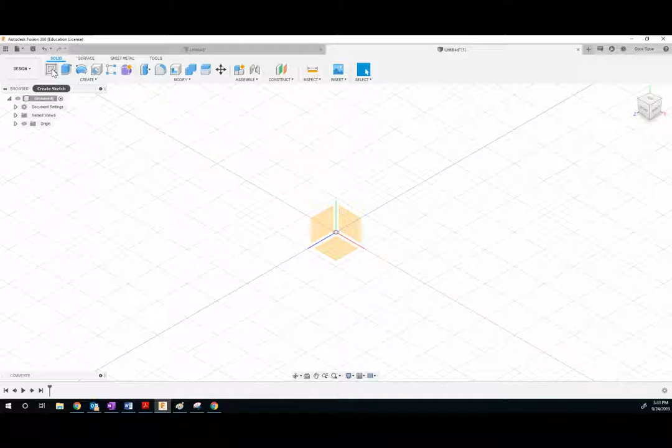Okay. So the very first thing that I think we should do is draw the rectangular base. So it looks like this side is 3. It's 3 centimeters. And then the long ways, that's like 1 plus 2 plus 2, that's 5. So 3 by 5. Let's make the rectangular base. So to do that, we're going to create a sketch. I'm going to do a rectangle. And I'll make this 3. I'll press the tab button. 5. Okay. And there we go. That's our rectangle. We'll finish the sketch.

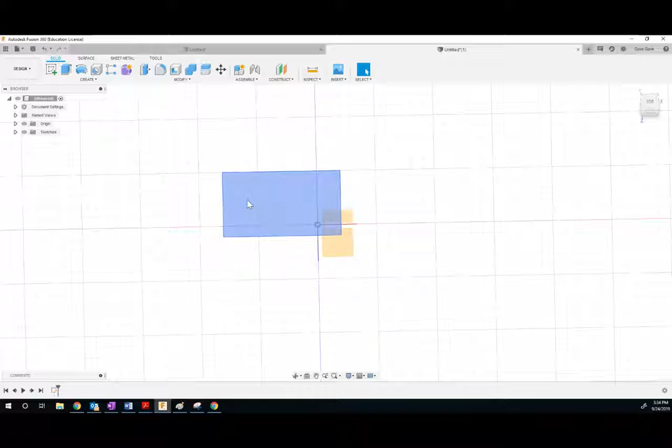And now we have to extrude this. Let's see how much we have to extrude this. I think what I'll do is I'll just add it up halfway here to this middle section. So it looks like this top part is 0.5 and the whole thing is 1. So it must be 0.5 to get up here. So let's extrude this. 0.5. And there you go, halfway done, right? Anyways, the origin is kind of bugging me out. I'm going to turn it off now.

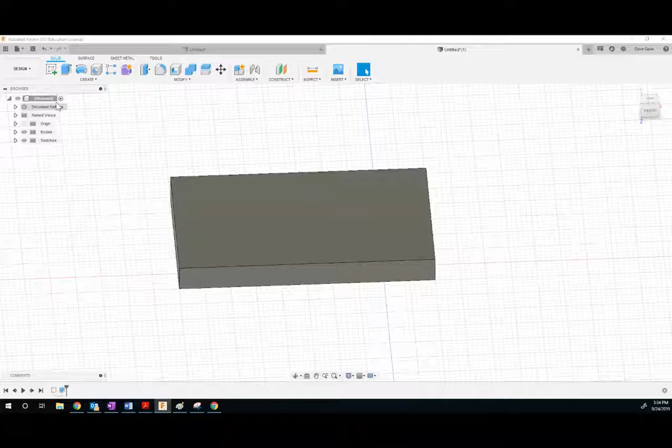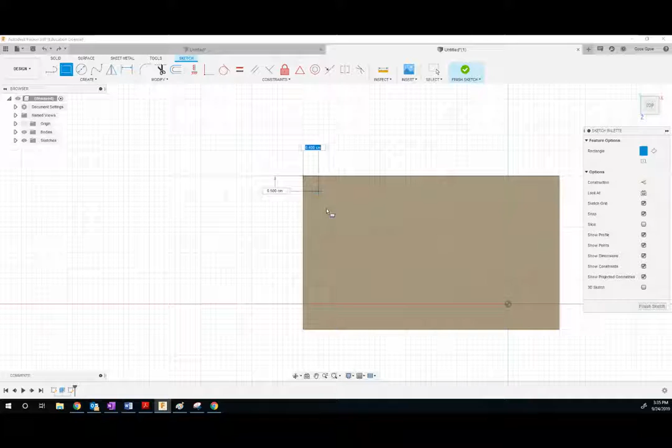So next, let's add this rectangle over here on the side. So that's 1 by 3. So I'm going to click Add a Sketch. And I'll do a rectangle. And I'll say it's 1 by 3. Now, if you're wondering, Poe, how do you so seamlessly type the numbers? Listen, it's with the tab button. So if you look at the caps lock on your keyboard, above that is tab, and tab switches back and forth between these. So I'll Control Z that. I'll undo it. So I click a rectangle, snap right here, and I'll do 1 tab 3. Oops, that's 0.3. Okay, cool. So now I'll finish that and extrude it. 0.5.

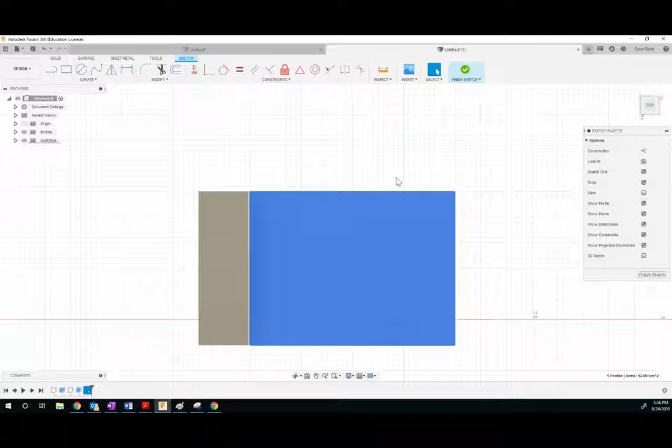And there's another rectangle on the other side. Looks like it's 2 by 3 instead of the other one that was 1 by 3. So let's make that rectangle 2 by 3. So 3 tab 2. Now let's extrude this to 0.5.

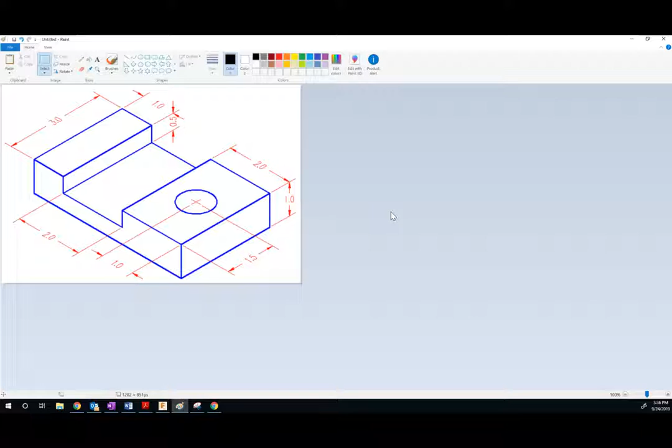All right, so we're almost done, except it doesn't have that circle here. And so I looked at this sketch, and it looks like the circle doesn't actually tell you its dimensions, which is a real bummer. It only tells you where the center is. So let's put that center in our shape with a sketch, and then we can do the circle afterwards. So I'll do a sketch. And it looks like the center is 1 to the left, 1.5 up. So you could, with your rectangle, say 1.5 up and 1 to the left.

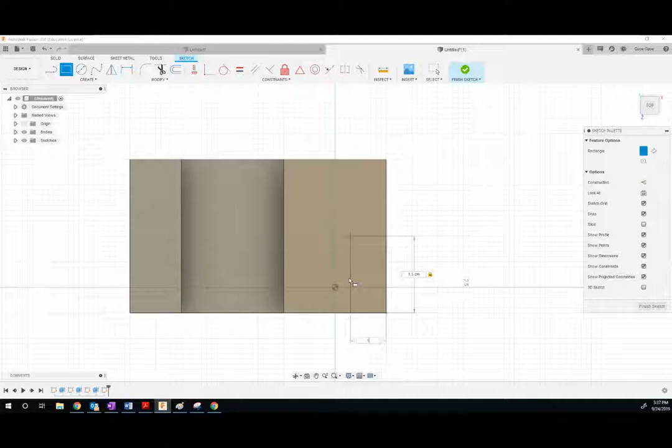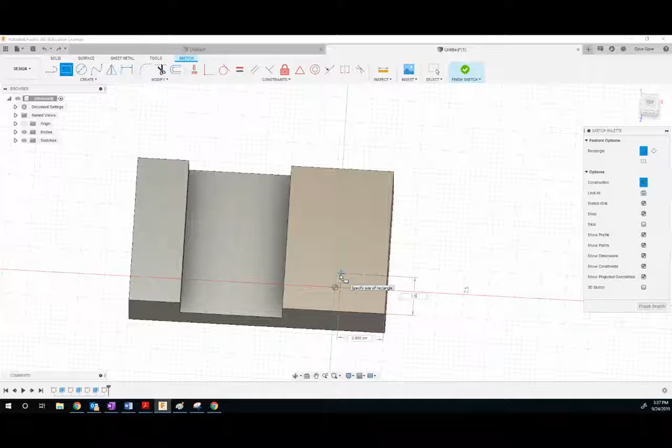Okay? Now, here's the thing, though. Whenever you extrude and stuff, it kind of confuses it because you'll have like shapes on shapes on shapes. And right now, maybe that's not a big deal to you, but it will be later when you do more complex things. So how you fix that is over here on the right, you can click Construction, and that means that the shape you draw is not really there. It's just to help create a secondary shape. So now, if I draw my 1.5 by 1, it doesn't act like there's anything there. However, it will help me draw my circle, where I'll turn off the construction now.

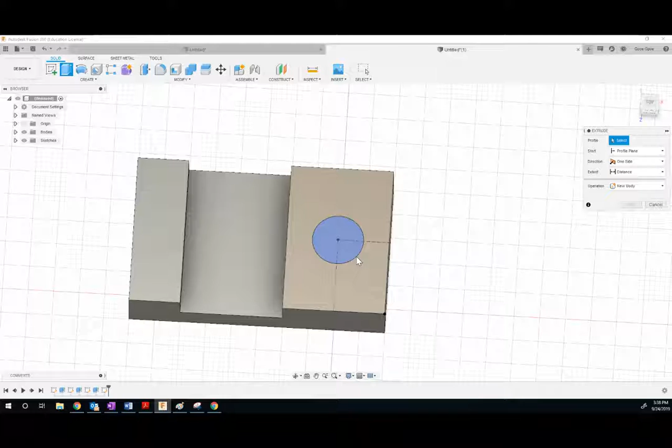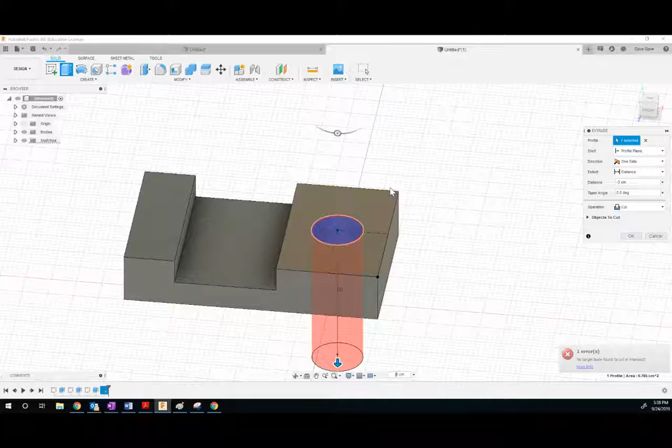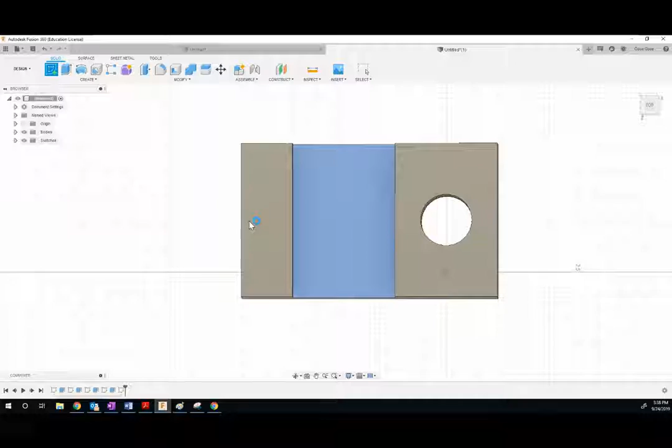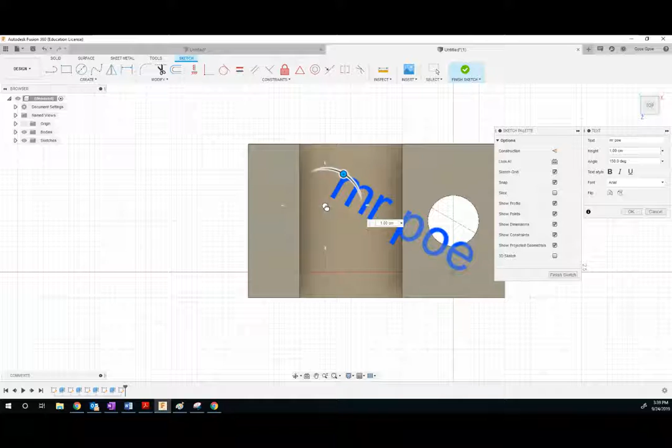However, I say in the canvas that I want you to draw your name on here somewhere. So to do that, you can really pick any old spot. It doesn't even have to be on the shape. I'll pick right here. And I'm going to create text. So I'll go under Create. And here's text. And yeah, I'm just going to type my name. Mr. Poe. Ooh, let's rotate that. It's a little big too. Let's make it a little smaller. How do I make this thing smaller? Oh, here. There we go. I'll finish the sketch, and let's extrude that.

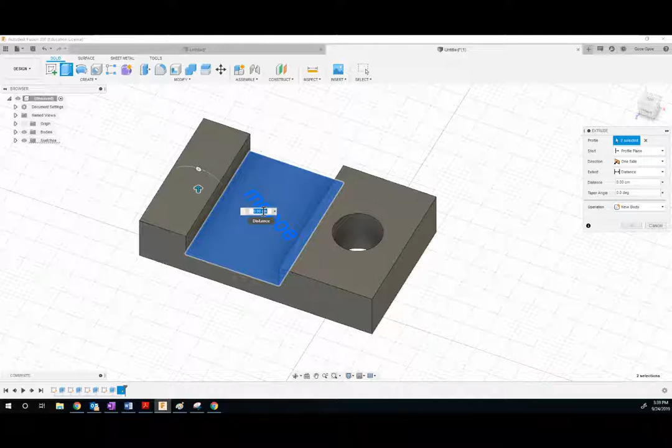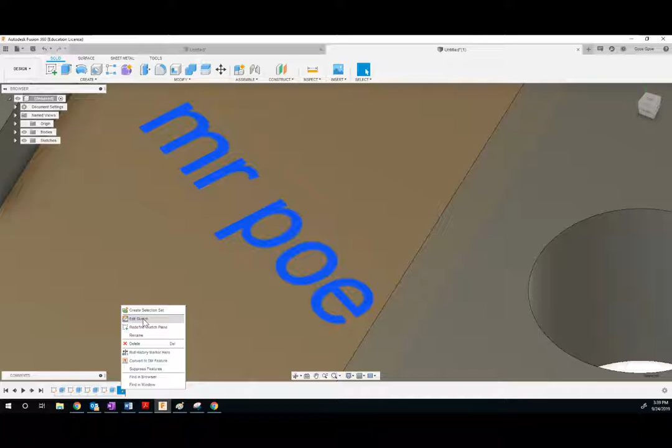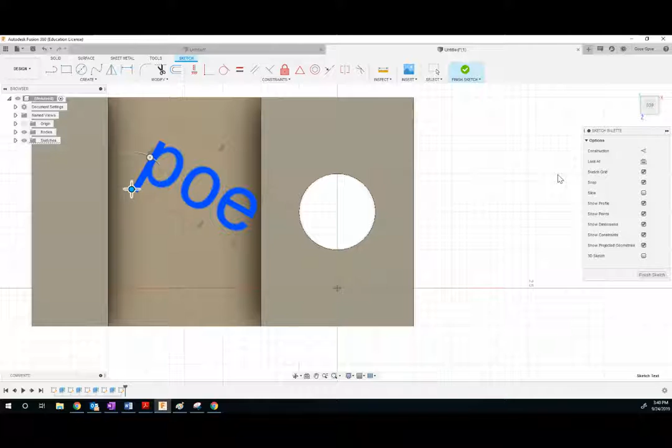So, oh no, that's not what I wanted. I wanted to extrude my name. Huh, why does it keep doing that? I'm going to make my sketch a little bigger. Maybe that'll fix it. I'll make it 1 big. Ooh, and instead of Mr. Poe, I'll just make it Poe. There we go. Maybe that's what the issue was. Weird, guys. That did not happen in my practice run. Oh, now it's letting me select my name. I don't know what was going on earlier.

So I'm going to extrude my name. I'll just say like 0.05 or something. And there you go. You're done.